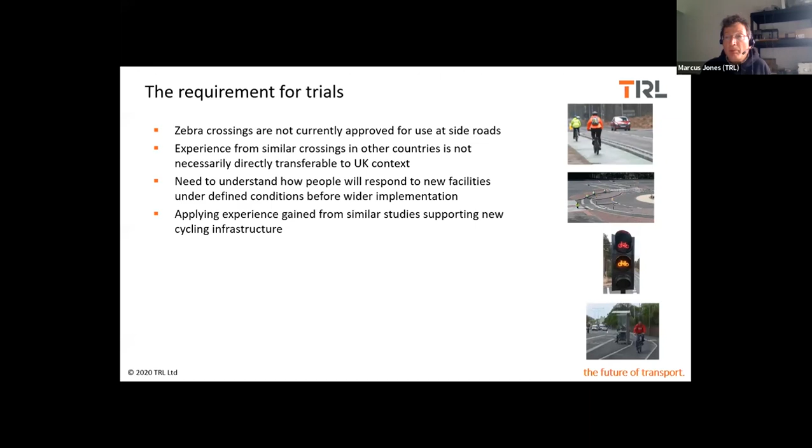So the kind of research methods we're applying here is, first of all, to look at the collision data TRL collects on behalf of the government. We analyse Stats 19 data, which gives you an overall picture of accident patterns, but is at a fairly low level of resolution.

We will also be doing surveys of the public using various techniques, which I'll say a little bit more about later. We're also using our driving simulator to see how people respond in a virtual environment, which is always useful. And then actually doing the assessment of the on-street trials.

So before the scheme goes in, and then observing how things change afterwards. By following through this approach, starting off with the accident data, then looking at attitudinal research, then progressing through simulators, and finally getting onto on-street trials, it means we've got a phased approach, so we can learn as we go along and feed that information back to TFGM.

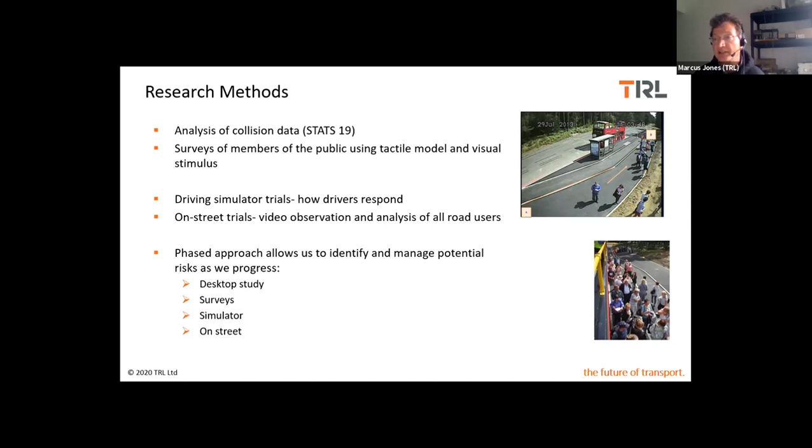And it also means if any risks get identified in the process, we can think about how to mitigate them before we get on street.

First of all, we did a review of accident data at existing crossings, comparing fully compliant zebra crossings with a simplified form of crossing, which is what is proposed for use at side roads. This meant identifying sites across the country where various kinds of non-standard infrastructure have been put in, sometimes on private roads such as supermarket accesses, but also on the public road network.

When we compared the collisions at the full zebra crossings and at comparators with no markings, we found no significant differences in collisions, and no significant difference between the types of collisions at full zebra crossings and the non-standard comparisons. Important to note that the sample size of collisions at the non-standard crossings was too small for statistical analysis, however the kind of collisions were similar. So overall, we conclude there's no indication of a big safety problem associated with the existing non-standard crossings compared with a standard zebra crossing.

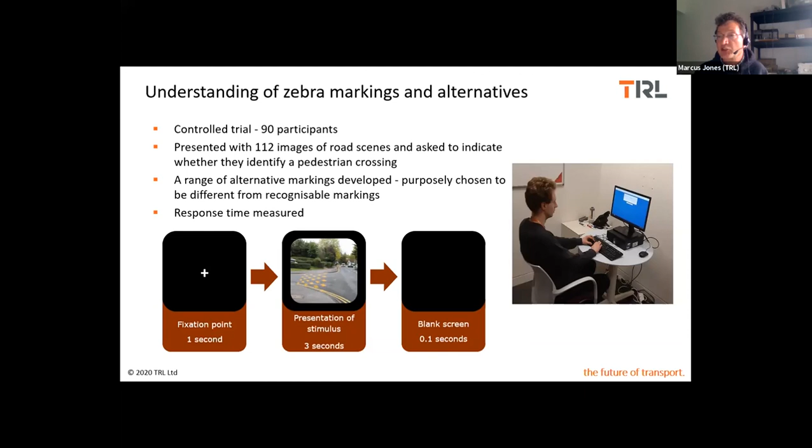We presented them with 112 images of road scenes on which we had marked up different types of crossings. These aren't real, these are edited screenshots showing a range of marking types, some of which look a bit like road crossings, others wholly unlike them, creating a broad range from recognizable crossing markings to things that look completely different. We asked them to indicate whether there was a pedestrian crossing in the image, and measured their reaction time.

So here on the chart you can see the results. Across the bottom are the different types of crossing markings: a recognizable zebra type marking, various stripy patterns, bubble markings, footprints. So we have things that might be familiar to people and things that are wholly unfamiliar, and an awful lot of these in practice would be very difficult to actually mark on the roads if you were to use them.

If you look at the recognition, it's very clear that the striped marking is very familiar to people. As soon as they saw a stripe marking - and that was all they saw, stripes on the road - they said there's a crossing there. Whereas with the other types of markings, there was a lot of doubt and uncertainty. When presented to pedestrian participants, there was slightly greater recognition, but even so, drivers still generally recognised this as what they would regard as a crossing, which is a very helpful finding.

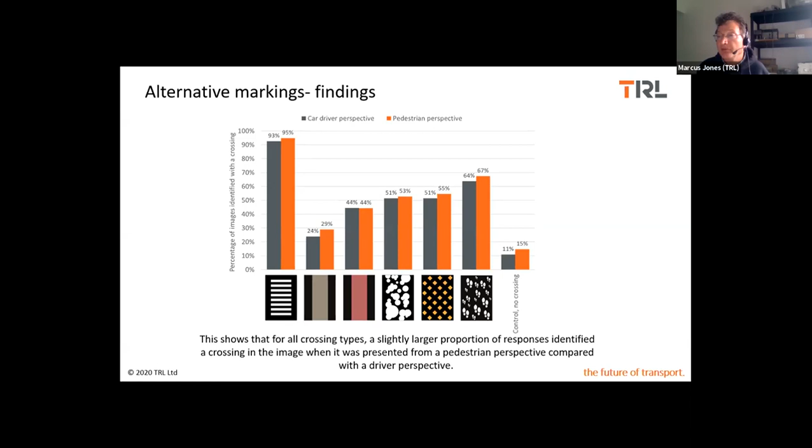We then wanted to look at public perceptions, finding out how people understand a new marking - importantly, what is it? If they recognize it's a crossing, who has priority at that point? Understanding what they would do, because we need to make sure people understand and behave as we would wish before we put this out there. So we did a trial at 10 sites, Manchester and London, asking about who has priority, how safe they feel, and how confident to cross they feel.

An important point I must stress on this research: here we were comparing the standard zebra crossing with the non-standard - so no Belisha beacons, but still the stripes we're considering for use on side road crossings. So it wasn't a complete assessment of how people would behave if there was nothing there. Very importantly, there was no difference in reported feelings of safety between the two types.

No difference in subjective ratings of visibility between the crossing types for drivers. That's really important - we need to make sure that they can see and will recognise that there's a crossing there.

Interestingly, drivers felt less safe about this than pedestrians did, about the fact that it was right up against the main road. In the UK, people are used to crossings being pushed down the side road, which adds to the detour and is the reason for moving it up to the side road. Naturally it's more convenient for drivers if pedestrians have to give way to them and they can use that space for themselves. If people feel less safe, in some ways there's an advantage because they're then likely to drive slower to respond to that. So that's not necessarily a bad finding.

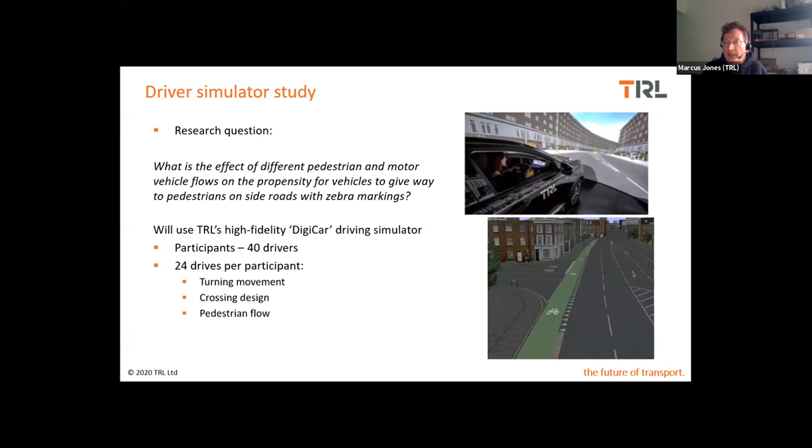The idea is that each driver participant will do 24 different runs, and we'll be looking at different turning movements - coming in or out of the side road, left or right - the nature of the crossing, whether there's no crossing or a standard crossing, and the number of pedestrians visible to them, to see how their behaviour changes. That's the simulator study, which will be resumed as soon as more normal business resumes.

Then we have the on-street trials, which will be done at 2 sites, currently a residential one and a shopping one. This is before and after - we'll be collecting video of the site for a period before the markings are put down, then Greater Manchester will put down the road markings, and we will observe what happens afterwards. The video will capture the full period.

What we will do is take a sample of pedestrians at the beginning of each hour - it's randomized, but done in a structured way. What we're looking at is who gives way, how long it takes people to cross, and what interactions take place. We use a conflict scale where at the lowest level, two road users might interact - they continue, one observes the other, and they continue their path without having to take any evasive action. The second level is that people might precautionarily give way and let the other one pass, right through up to more severe levels of interaction where someone has to brake or stop suddenly.

By looking at the levels of interactions, we're able to get an assessment of risk, because fortunately actual collisions are very rare. So what we're looking at is the behaviours that lead towards actual collisions. By looking at the lower level conflicts, we can understand whether the level of risk has changed. And clearly, we want to understand, are drivers willing to give way?

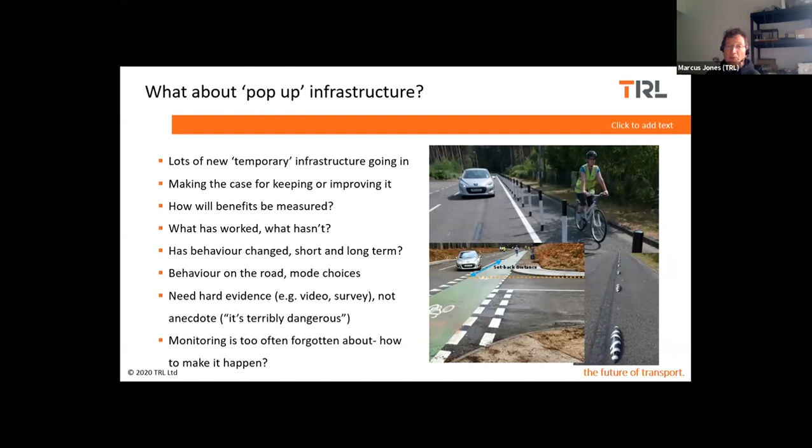So I think I'd be really interested in other people's views really on how do we take this forward. So thank you, I shall leave it there.

I'm getting my head around the way a lot of these acts and regulations work, and I thought I'd have a go at thinking how we could make zebras without globes, Belisha beacons and zigzags legal as simply as we could, because it's not easy to change the law, particularly when it gets complicated. And to take up something Marcus said, it's not possible to do side road zebras.

I think it is, and there are examples out there. The problem is we can't do them without all the paraphernalia of beacons and zigzags, and they're not really designed and laid out in the guidance to work at side roads. But I don't think there's anything legally preventing them being placed there. It's just they're a bit clunky and expensive.

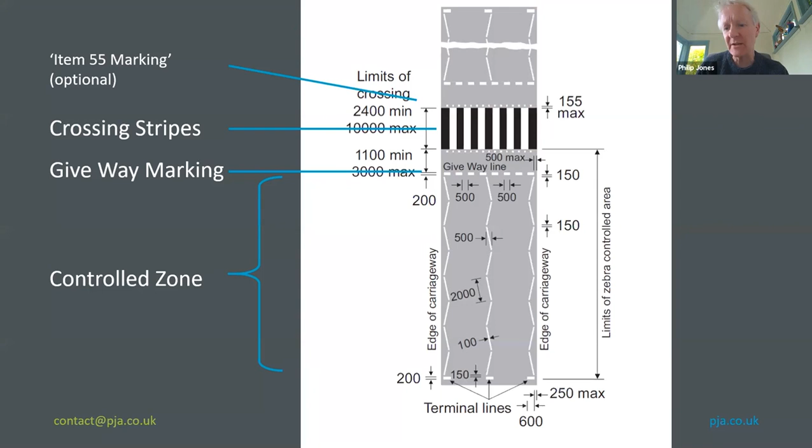Let's delve a bit deeper. We go into this paragraph, clunkily cited as paragraph 19 in Schedule 14. Schedule 14 is the bit of TSRGD that deals with signals and crossings. This says what the Give Way line does. It conveys to vehicular traffic, not the driver interestingly, conveys to the traffic proceeding towards the zebra crossing.

The position at or before which a vehicle must be stopped. So if you don't have the Give Way line and just have the stripes, there's nothing in law that says the driver has to stop. That's an important component in the crossing as it currently stands. We know that drivers obey the stripes. They don't really look at the Give Way marking, but legally that's what they actually obey.

And then we've got this other bit, taken from the definitions. It defines the zebra controlled area, and there's a similar clause for the parallel controlled area. It says what that's doing, and it's constituted with zigzag lines and all the rest of it. As I say, there are similar requirements for the controlled area and the Give Way marking at parallel crossings.

Hope you're staying with all this - there'll be questions afterwards. What is a zebra crossing? Well, this is the definition. It's a provision where provision is made for pedestrians to cross the carriageway, and the presence of which is indicated by a yellow globe, which everyone calls a Belisha beacon, but legally is called a yellow globe.

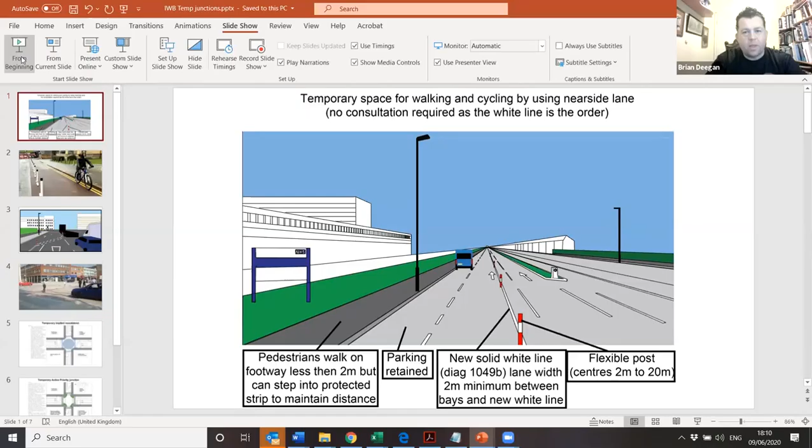Lots of people are asking, well, okay, the pop-up lanes are going in - I showed this many weeks ago now, time's flying, it's a kind of basic thing to do. But what happens when these pop-up lanes meet junctions? I'm already seeing some quite tricky photos where I'm a little bit worried about the way people are just leading stuff up to stop lines and then going, off you go, sunshine. Not particularly good. We're trying to encourage people who maybe have been cycling at the weekend, and we know there's 4 times as many people doing that from some of the data I've seen.

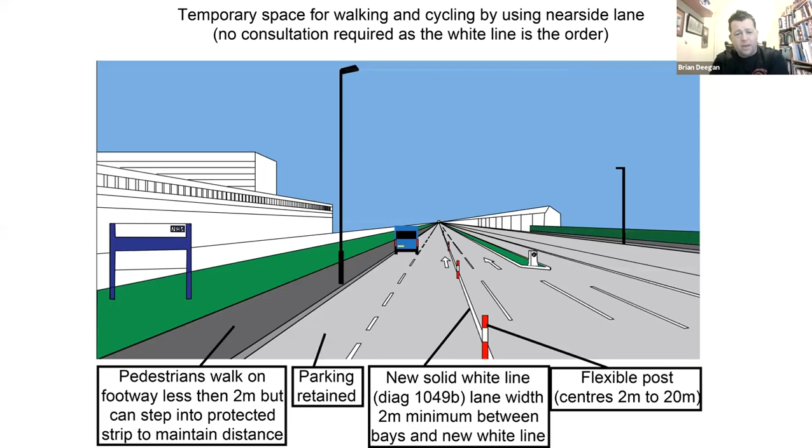And the cars that are coming over into that left turning lane have to give way, they have to give way to cyclists passing through there, then they pass over. The theory of a mixing zone is that you manage the conflict on the way to the stop line, not at the point where the light goes green and all hell breaks loose and suddenly you've been left in the middle and you've got heavy left turning traffic coming across you. That's our number one cause of fatality, particularly in London. So I'm really keen to avoid that kind of arrangement.

So I think this is like the most basic thing you can do, and we're talking about doing this in Greater Manchester as just a kind of basic ask. It's the sort of Danish style approach, albeit they have many variations, and they've been using it quite a bit in New York and across the States as well. So that's basically what one is. For a couple of temporary islands and a couple of flexible posts and a couple of give-aways, you can kind of legally do that. I'm putting an extra give-away and maybe a couple of COVID emergency temporary situation signs on the approach. But that's what one looks like, and that's kind of how it works. It's not the highest level of service, but it'll give you some kind of chance.

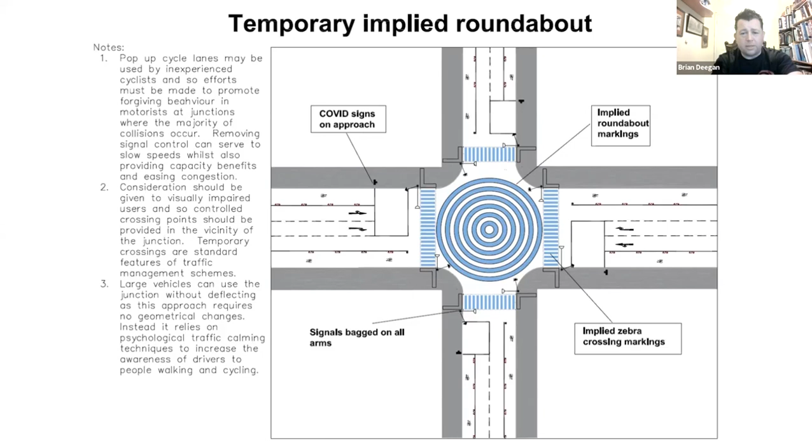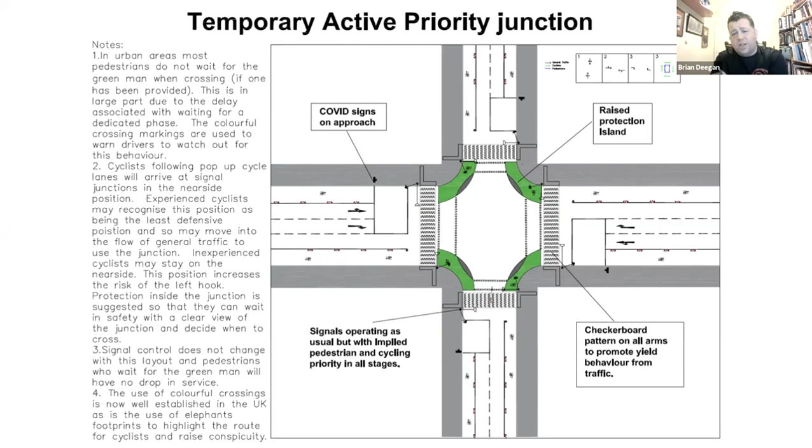But I'm going to show you some even wackier ideas now, in the perspective of a kind of temporary protected junction. Again, you could bag the signals and just paint in implied stuff and let people roll through. But I think there's a potentially cheekier way of keeping the signal junctions on. I'll explain this quickly on this little visualization I did, for if you're arriving on the near side as a cyclist - we'll do cyclists and then pedestrians in a bit.

So the green's gone. You're on the other side of that bollard in the foreground, and I've painted some kind of colourful crossing across there. So you'll cycle through at the same time as vehicles. It'll be a standard method of control, a kind of north-south cars, east-west cars, and then an all ped stage. That's our method of control here.

So you're going through alongside that van, but you'd be a little bit worried perhaps about that van cutting across you to the left, even if he's not indicating, he might well be. You'll have an option of either going straight through the lane, coming out of the light segregation earlier and mixing it so you're in line with that van, so he's not going to hook across you. So all the standard ways we're trained to get through these junctions still apply.

Or for the new people, they have this kind of near side space to go and wait in. You can go into that near side advisory bit of coloured green, and there's some kind of raised curb - I've made that look like a particular product some people will recognise, but that kind of thing could be in a junction.

And the concept of a protected junction, really, as I see it, is that there's some kind of protection in the mouth of the junction itself. So then that van turns round, avoids the curb, avoids the flexible post. You can go, all right, he's out of the way. And then the cyclists, particularly the ones doing it for the first time, can have real full sight of the junction and judge for themselves when they feel it's safest to get across.

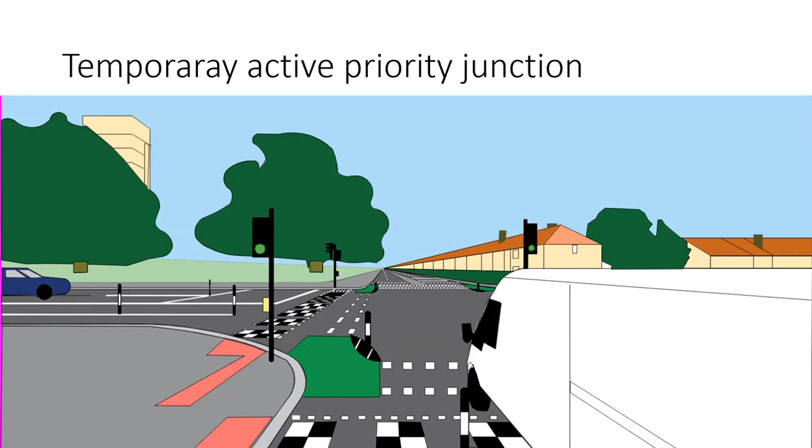So yeah, it can work with exactly the same method of control that we've got, and you can basically circulate cyclists round, or at least do it stage by stage to cut across. But for me, particularly when you're coming across a major junction, this is kind of the behaviour some cyclists do - crawl over to the side, have a little look, when is it safe to go, particularly if you haven't done it for a while and you're really worried and hugging that curb. I think we need to put something in to protect people. This cordons off some of the space, but you've already taken a lane out for general traffic on the approach, so the space is there.

One of the things I put in, and this is potentially the more controversial element, is the use of a colourful crossing. So let's do the pedestrian journey now. A pedestrian comes up to there and they can go, all right, it's on a red, I haven't got a green man, I'll just wait here.

They can wait and potentially push a button, it gets activated, and that green man comes, and then they've got a conflict-free crossing - the way it actually works in real life. But we find with pedestrians, particularly in London, that not a lot of them are waiting for that green man. Normally our cycle times are so long, and Phil and I could talk all day about turning the corner and how we could get that efficiency.

But for this case, if the pedestrian does walk out because they don't want to wait, perhaps there's lots of people congregating and they're feeling the pressure of closely associating with people in the middle of a pandemic, and they go, actually, it's clear enough, I'll walk now.

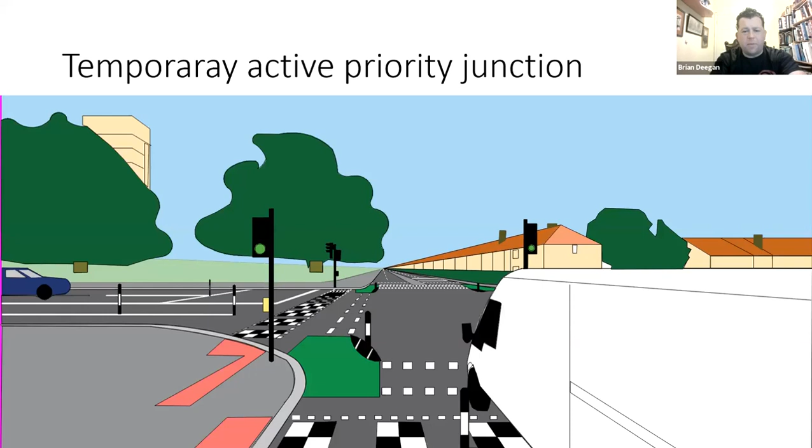That's about it from me. I'll leave that one lingering and open it up to a little bit of discussion.